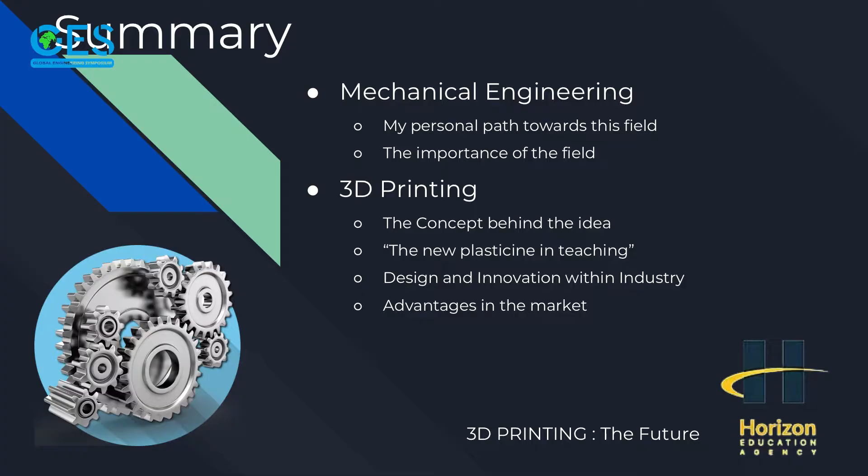So when I was young, I got some toys from my father and my mother, and I was very clumsy, so I was all the time breaking the toys. But at the same time, I wanted to fix them. I wanted to understand how they work from inside. So then I passed to the bicycles. I watched the strings, I watched the wheels, I watched all the metal that is inside.

So when I was in the 12th grade and I was trying to decide what to follow, I asked my uncle, who is an electronic engineer, and I asked my father, who is a mechanical engineer. And later I decided to go into mechanical engineering because I want to know how things work. I want to know what is behind the curtains when you see all of these objects, even the simple chair - how does the chair recline? And I went to ISEP. ISEP has a lot of programs for foreign students, so if you would like to ask me questions later about ISEP, you are most welcome to.

Nowadays in Portugal, for example, to point out the importance of mechanical engineering, all the grades to enter university are getting higher. In the past, it was medicine. Now, the best students from secondary schools are engineers. Our grades are from 0 to 20, so as close as 20, the better the grade is.

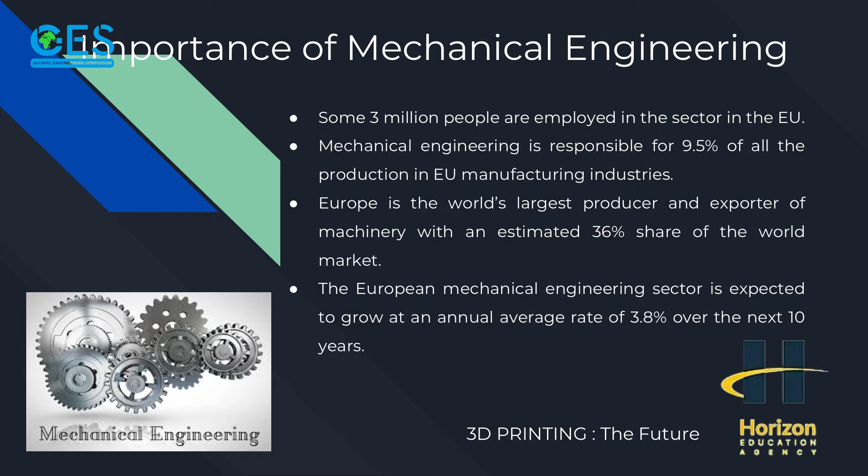Also the importance of mechanical engineers: some 3 million people are employed in the sector in the European Union. It's responsible for 9.5% of all the production of EU manufacturing industries. Europe is the world's largest producer and exporter of machinery, with an estimated 36% share of the world market.

So it's a sector that is ready to explode in the future. So we need to catch up with the train and form even more students so it can create new job opportunities, and hopefully more startups for mechanical engineers.

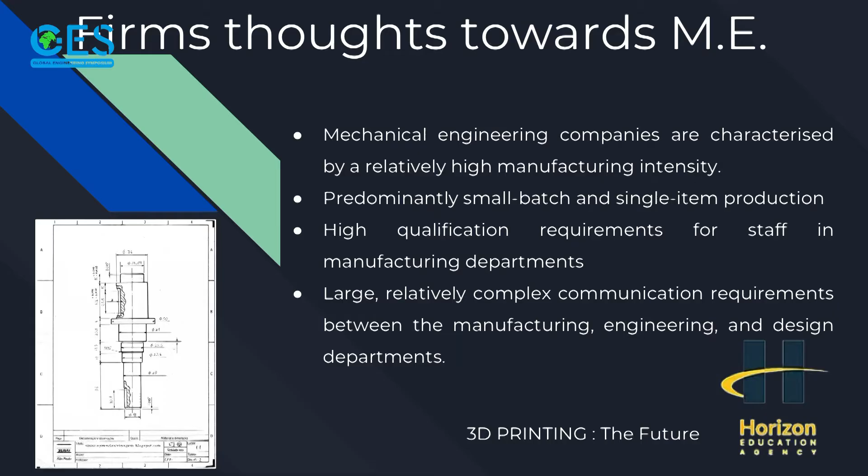And what are the thoughts about the companies that want to hire mechanical engineers? They have relatively high manufacturing intensity, so a lot of products coming from the assembly line, high qualification requirements for staff in manufacturing departments. So it's a person who has to deal with a series of staff, from the simple worker to the boss, to create a connection between all of them with the products and with the requirements and measures. So there's relatively complex communication requirements between manufacturing, engineering, and design departments. But what are the future challenges?

The research is vital to the competitiveness of the sector. So nowadays, most companies are putting very strong ideas on creating patents. Because if you create something and don't patent it, someone, for example, in China can do it for a much lesser price because of the huge market they have there of raw materials. So it's always important to protect your ideas, so you have to create patents.

And there is also a need for a stable, predictable, and coherent regulatory environment that embraces smart principles and is as straightforward as possible. It means you have to create clear and directive ideas, so the job is done by the simplest worker as fast and as simple as possible.

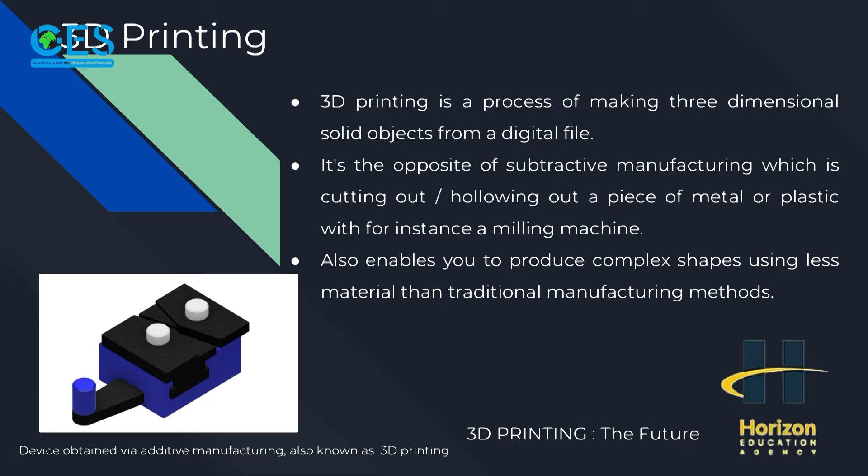So about 3D printing: it is the process of making three-dimensional solid objects from a digital file. It's the opposite of subtractive manufacturing, which is cutting out or hollowing out a piece of metal or plastic with, for instance, a milling machine. So instead of creating a steel plate, then bending it, then making drills, which is subtractive manufacturing, 3D printing is about adding material to create the shape we want. It also enables you to produce complex shapes using less material than traditional manufacturing methods.

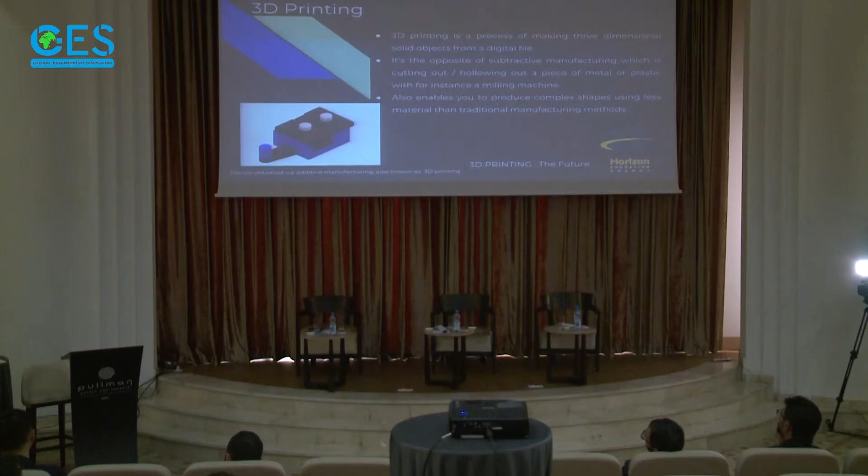So this is the basic modus operandi. It all starts with a 3D model. It can be, for example, SolidWorks or Autodesk Inventor. You can create one yourself or download one from a 3D repository. When creating it yourself, you can choose to use a 3D scanner, app, device, code, or 3D modeling software. Then comes the slicing part, dividing the 3D model into hundreds or thousands of horizontal layers using a proper program. But some of the programs in the 3D printer machines already have this tool, so you don't need to actually create the file.

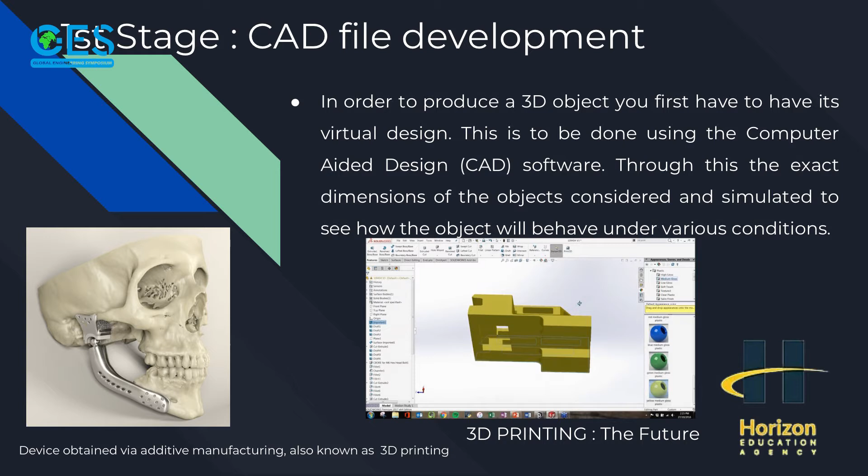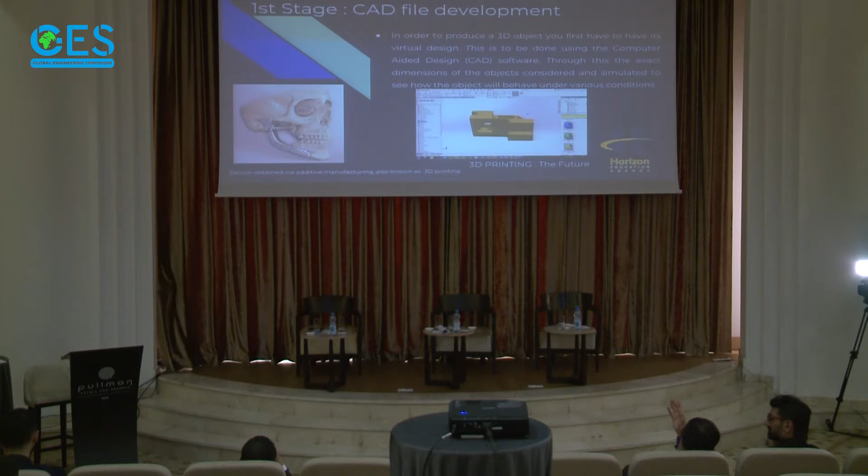Dividing it by steps, this is the CAD file development. You have to use a computer-aided design program, for example, in this picture, SolidWorks. Then you can choose the material and the colors. Then you pass that 3D file into an STL type of file. Some programs already have this option when you save the drawing.

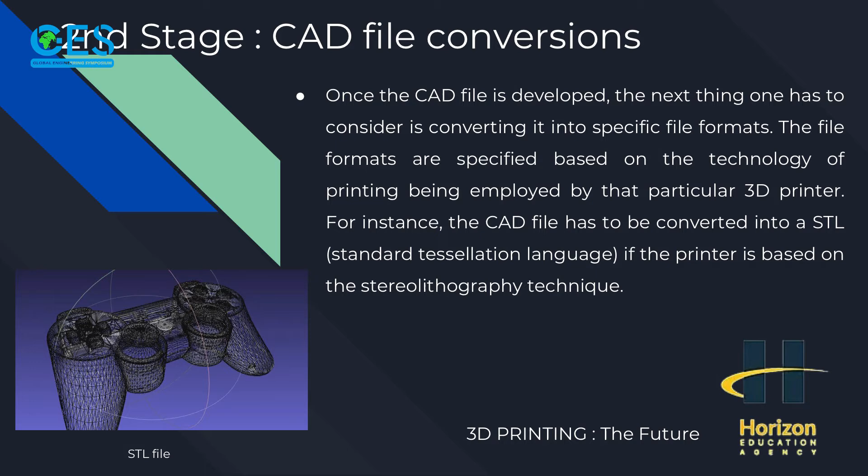What the 3D printer machines usually use is the stereolithography technique, most commonly referred to as SLA, one of the most popular and widespread techniques in the world of additive manufacturing. It works by using a high-powered laser to harden the liquid resin contained in a reservoir to create the desired 3D shape.

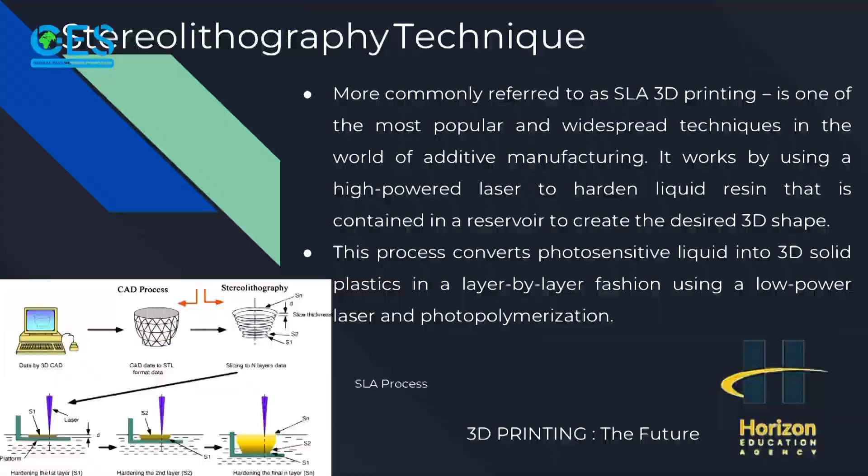So here we have the computer saving the file from CAD to STL. Then there are the layers, here's the laser slicing in the resin, and then it creates this shape. Of course, there are other types of techniques.

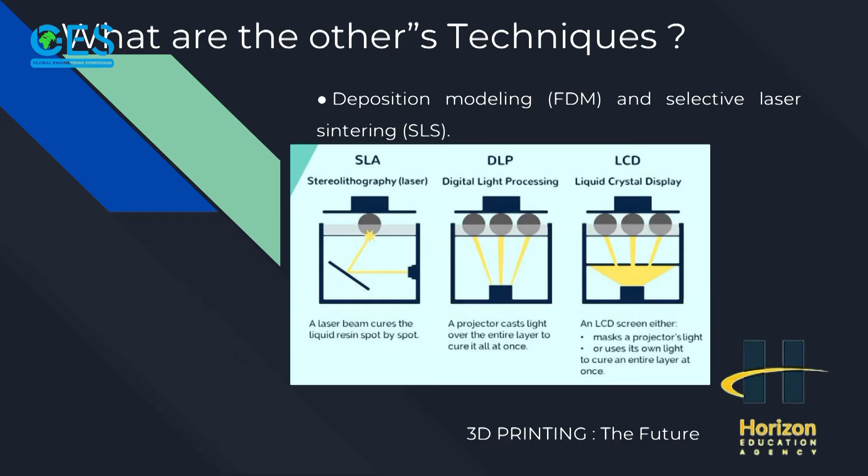For example, we have fused deposition modeling, FDM, and selective laser sintering. We can also divide SLA into DLP, digital light processing, and LCD, liquid crystal display. In the case of DLP, a projector casts light over the entire layer to cure it all at once. For LCD, the screen either masks a projector's light or uses its own light to cure the entire layer at once.

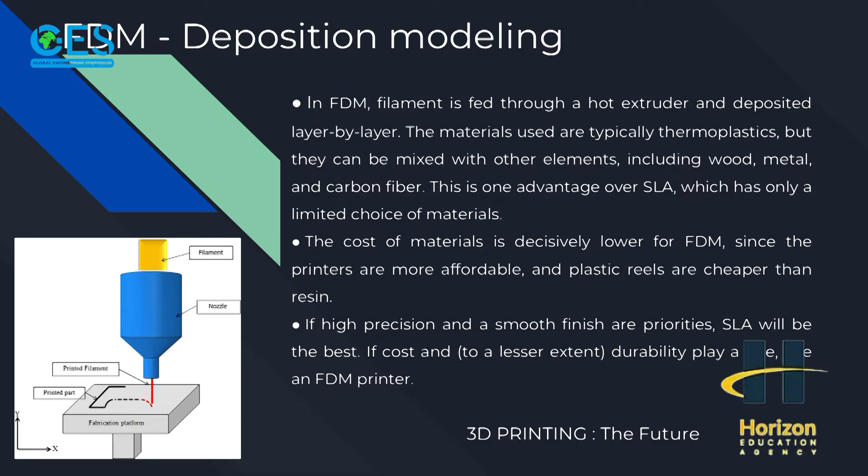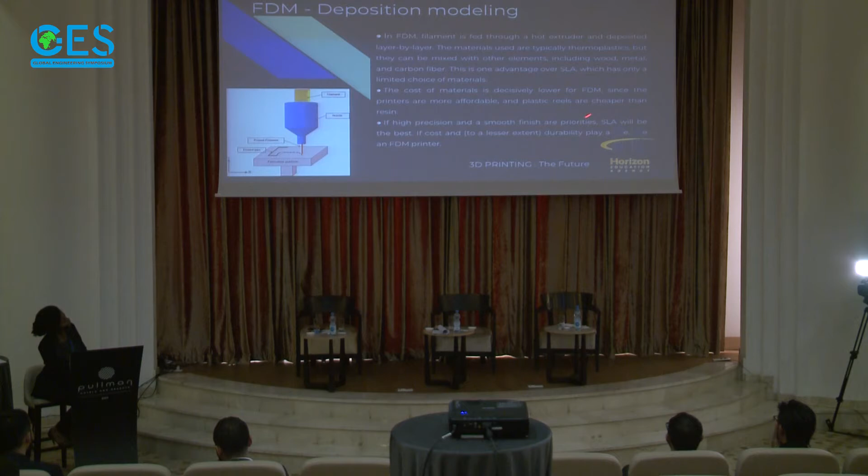In the case of FDM, a filament is fed through a hot extruder and deposited layer by layer. These materials are typically thermoplastics, but can also be mixed with other elements, including wood, metal, and carbon fiber. This is one of the major advantages over SLA, which has a limited choice of materials, for example ceramics, mostly resins. The cost of materials is decisively lower for FDM, since the printers are more affordable and plastic reels are cheaper than resin. If high precision and a smooth finish are priorities, SLA is the best choice. If cost, and to a lesser extent durability, plays a role, an FDM printer is the best.

In case of SLS, selective laser sintering, this is a nylon powder, and the laser will use this powder and sinter it. It's more powerful because instead of curing a substance, the beam hits a powder to the point of fusing particles together. Prints are especially strong and durable, also because supports aren't necessary, and prints can be of complex geometries. So if high mechanical strength and complex shapes are your priority, and cost is of minor importance, use SLS. Otherwise, SLA is still the best choice for you.

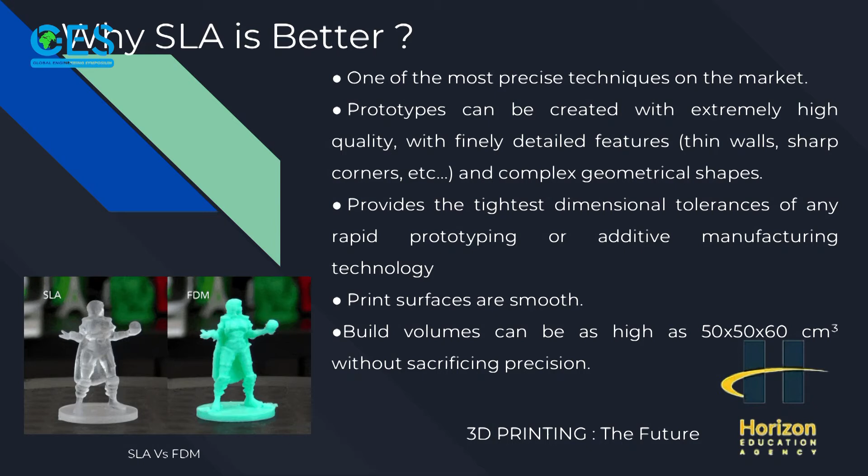But I was talking about so many of these, and my focus should be SLA. Why is SLA better? It's one of the most precise techniques on the market. The print surfaces are smooth. Compare this picture with this one, see the endings.

And of course, the sizes are not the greatest. We're talking about 50 by 50 by 60 cubic centimeters without sacrificing precision. So it's rather small objects.

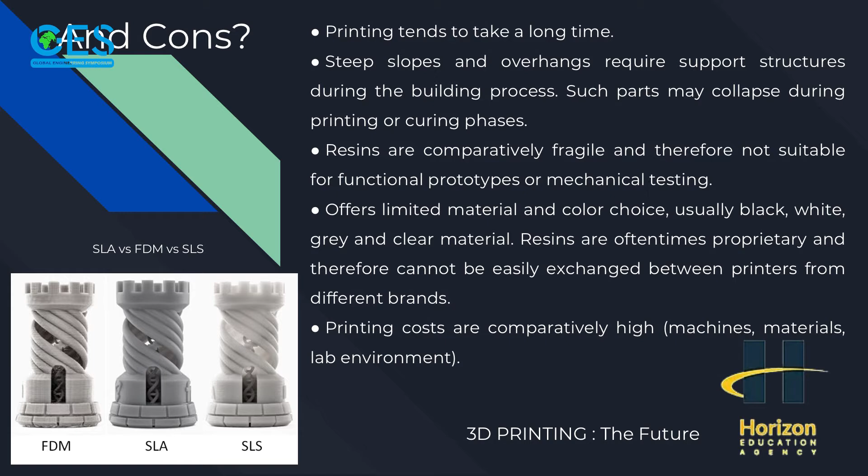But of course, there is also something against SLA. Prints tend to take a long time. For example, for a 3D printer machine, the fastest you can get is around 10 minutes, but for big objects with complex shapes, it can take several days. So it's all about the waiting there.

Steep slopes and overhangs require support structures during the building process. Also, you need a good technician to operate this 3D machine. We're also talking about that.

Resins are comparatively fragile and therefore not suitable for functional prototypes or mechanical testing. It offers limited materials and color choices, mostly ceramics and resins, usually black, white, gray, and clear material. So the choice of color that the printer produces with SLA is not very great.

Those resins are oftentimes proprietary and therefore cannot be easily exchanged between printers from different brands. So the resin from printer X and the resin from printer Y are very different, you cannot swap between them. So there's only a small choice in the market.

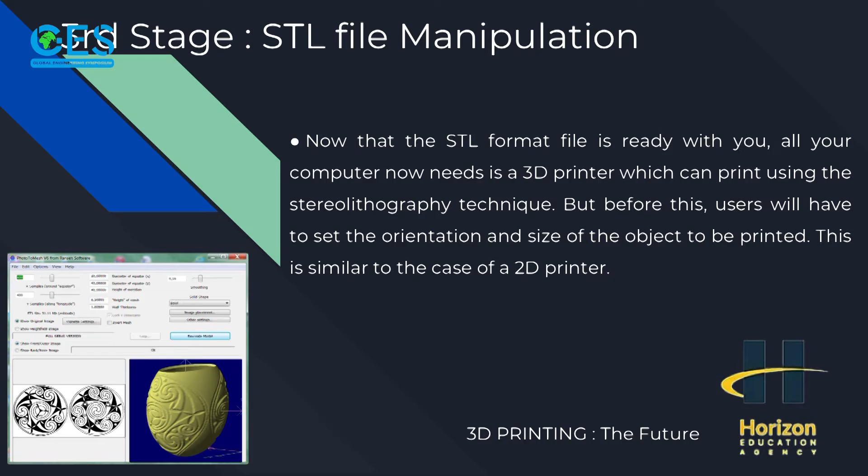Passing now to the third stage, there is the STL file manipulation. After you create the STL file, you need to choose categories like height, velocity of the machine, and materials. Once the file is ready, all the computer needs is a 3D printer which can print using the stereolithography technique, SLA.

But before this, users will have to set the orientation and size of the object to be printed. This is similar to a 2D printer, where we also choose how the text will appear on the paper, whether it's horizontal, vertical, and so on.

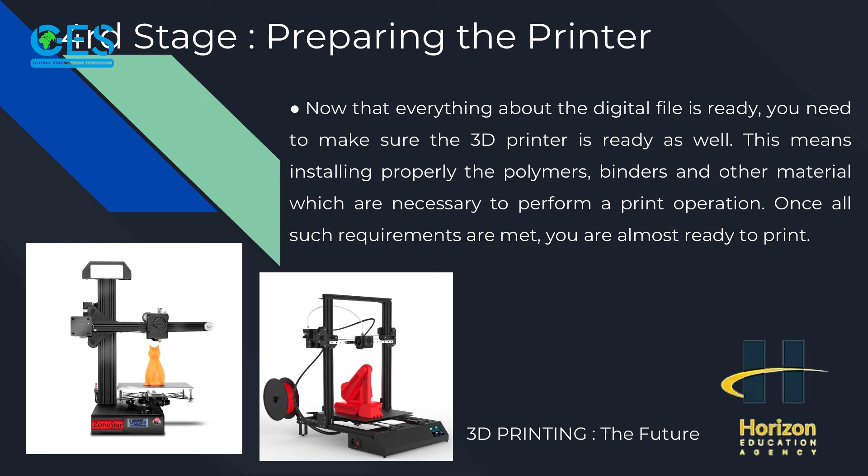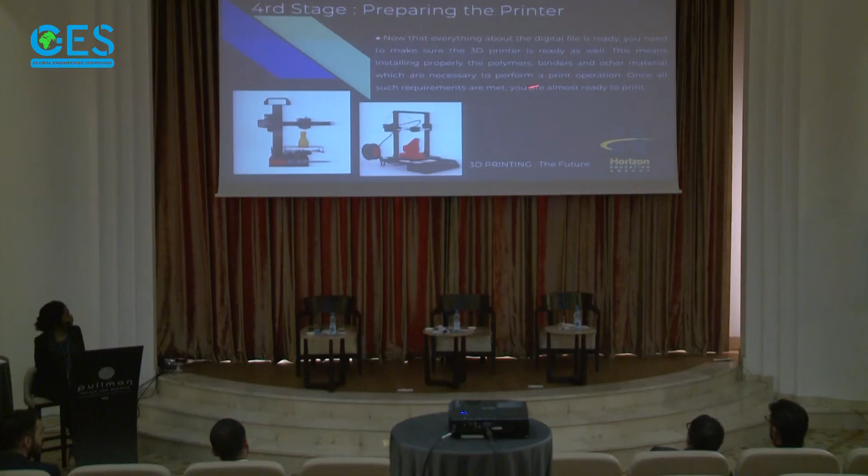Then the fourth stage, you need to prepare the printer. Of course, it needs to be connected to energy, but we also need to make sure we install the polymers, the materials that we need, which is necessary to perform the print operation. Once such requirements are met, you're almost ready to print.

Then there is the building up. Now this part is all about waiting. As I said before, it can take from 10 minutes to several days, depending on the size and complexity of the material.

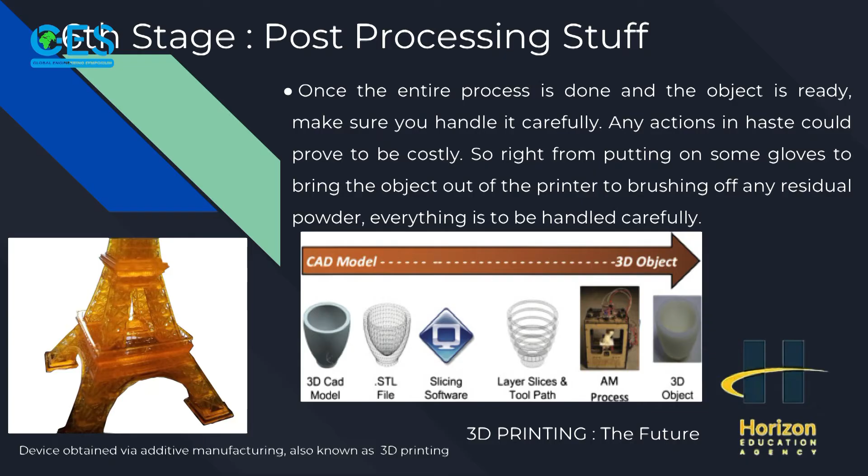Then there's the post-processing stage. You cannot just take the piece and try to push it hard with your hand. You need to be careful the first time you use the material.

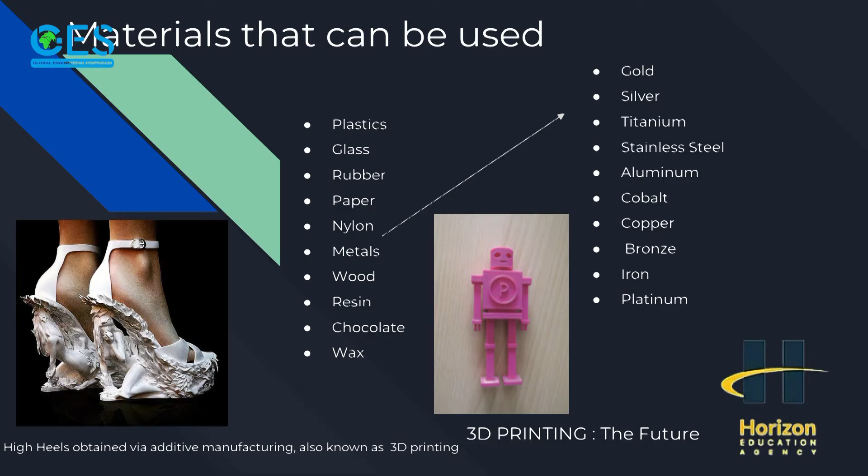Talking about the materials that can be used, there's a whole variety of choices, even chocolate can be used in the 3D printer machine. There are also all these metals: gold, silver, titanium, stainless steel, aluminum, cobalt, copper, bronze, iron, platinum.

Reconstructing bones and body parts in forensic pathology, and reconstructing heavily damaged evidence retrieved from a crime scene. So it can also be used by the police.

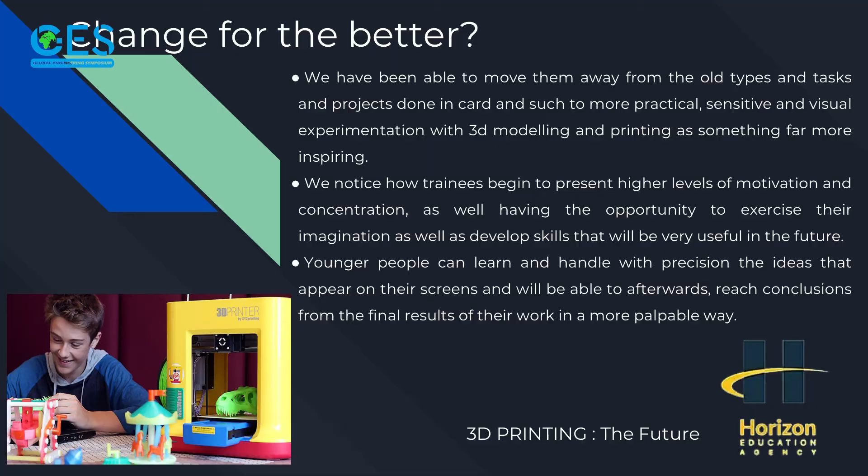But is it changed for better? We notice how trainees begin to present high levels of motivation and concentration. There are already studies that prove that using these 3D printer machines, children get more motivated and more concentrated, and they have the opportunity to show their teachers and colleagues their imagination on a whole new level.

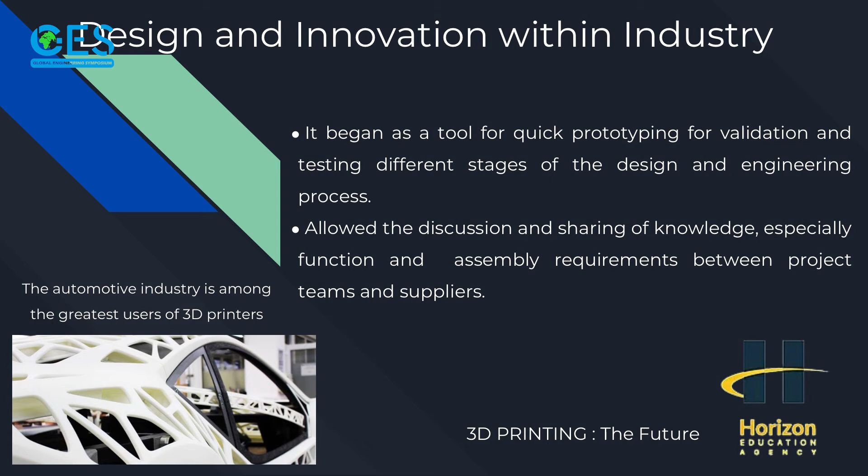Within the industry, it began as a tool for quick prototyping and validation testing at different stages of the design and engineering process, allowing the discussion and sharing of knowledge, especially function and assembly requirements between project teams and suppliers.

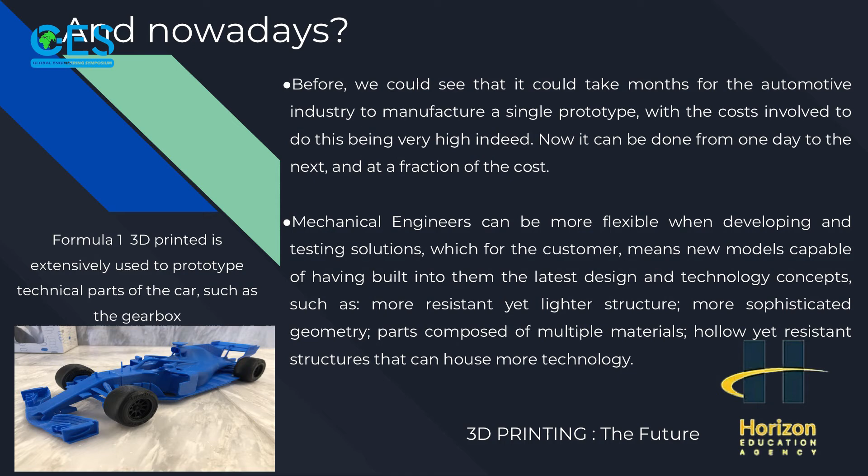For example, nowadays Formula One extensively uses gearboxes made by a 3D printer. Mechanical engineers can be more flexible when developing and testing solutions, with more freedom to test ideas without needing the whole team to make a prototype that can take months to build, and then needs changes again.

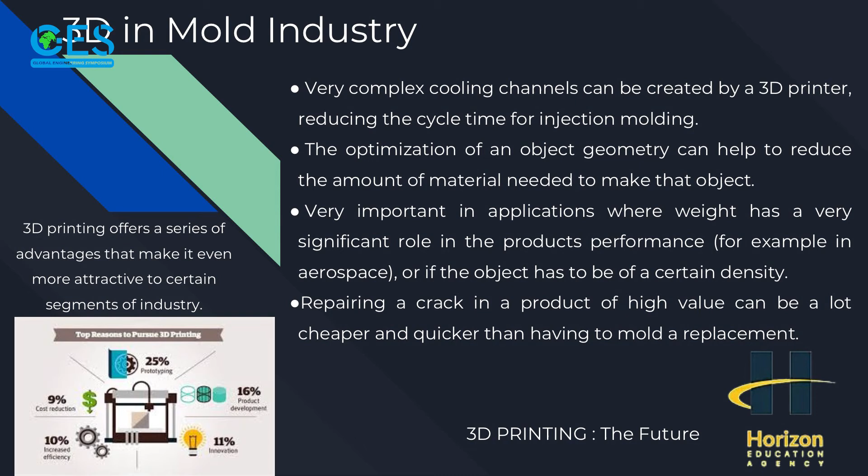So we are talking about a process of months, but with a 3D printer they can reduce that process to a couple of days. Also, speaking about the mold industry, very complex cooling channels can be created by a 3D printer, reducing the cycle time of injection molding.

Repairing a crack in a high-value product can be a lot cheaper and quicker than molding a replacement. That's why it applies to artifacts too — if the idea is to rebuild an artifact to its original shape, you can use a 3D printer, because replacement of a nation's artifact is otherwise impossible to get.

But of course, there are also challenges in the industry. You can't just put a 3D printer machine in the middle of the factory and expect it to magically work. You need to hire technicians, and you need to give them hours and hours of training.

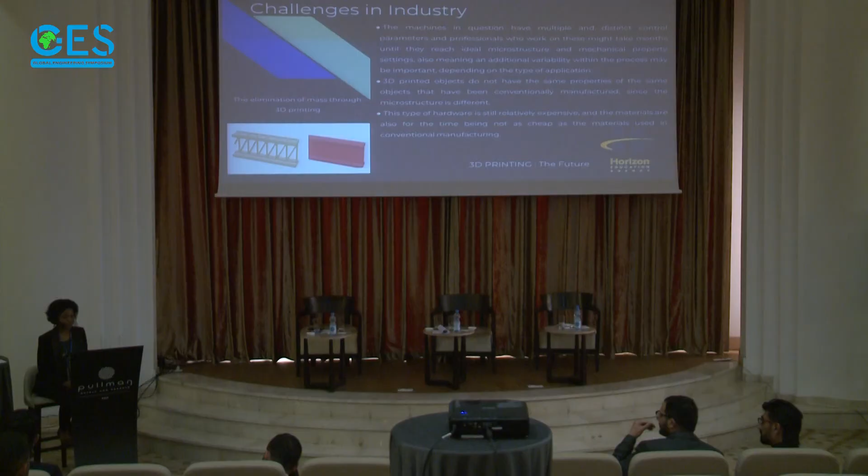So there's a lot to work with, and you need to decide which type of material you are going to use. They don't have the same properties as objects that have been conventionally manufactured, since the microstructure is different.

But in the future, as 3D printing becomes more homogeneous, costs are expected to fall, especially the cost of materials. So in the future, it will be easier to recruit more talented youngsters. 3D printing provides additional technology that they can exercise their creativity to an advantage.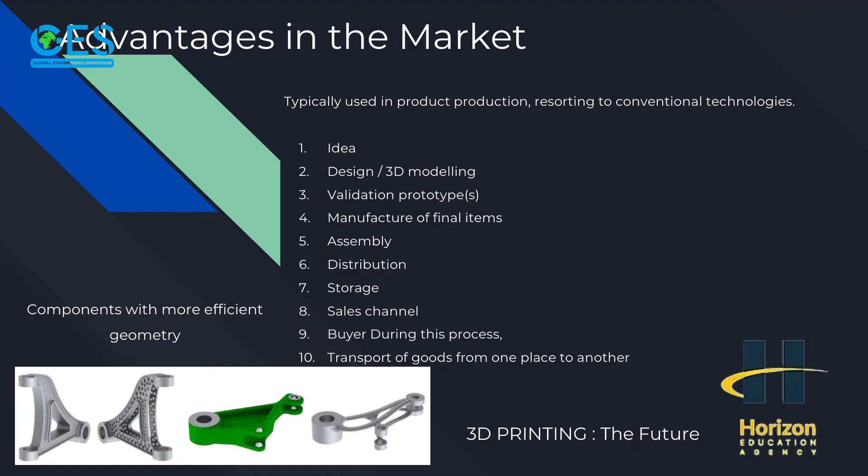Now I'm going to show you more or less the advantages in the market. This is the typical process from the company: there is an idea, there is 3D modeling, for example in SolidWorks, there is a validation prototype, there is manufacture of final items, assembly, distribution, storage, sales channel, buyer during the process, and transport of goods from one place to another. So it's a huge quagmire.

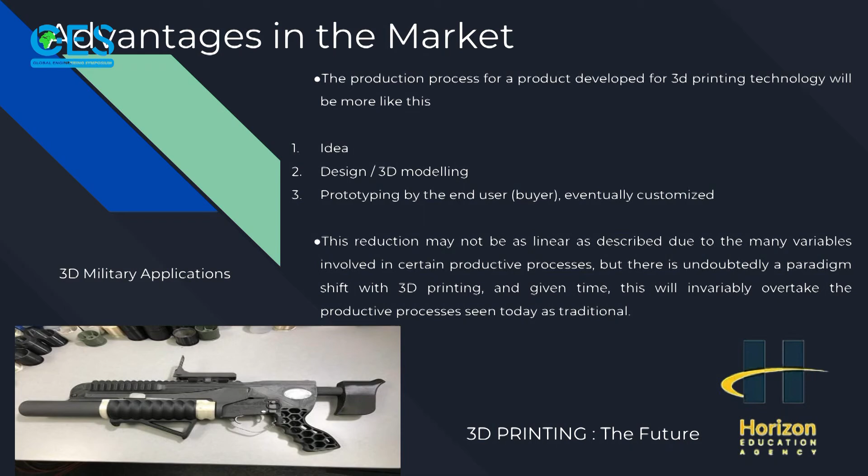But with 3D printing, this is a very simple way of saying it, it's not correct in all cases, but the main idea is to have just the idea of the client, the design in 3D modeling, and the prototyping by the end user, the buyer. So you guys come to me with an idea, I do it in my home in my SolidWorks program, I send you the idea, you have a 3D printer machine in your company, you just have to print it, and that's done.

Over here in this picture, there's also military applications. There was a case a couple of years ago in the United States where someone created a gun in SolidWorks, and that gun made by a 3D printer machine can be deadly. So the American government tried to erase all of these gun designs, so people just cannot make guns at home when they want.

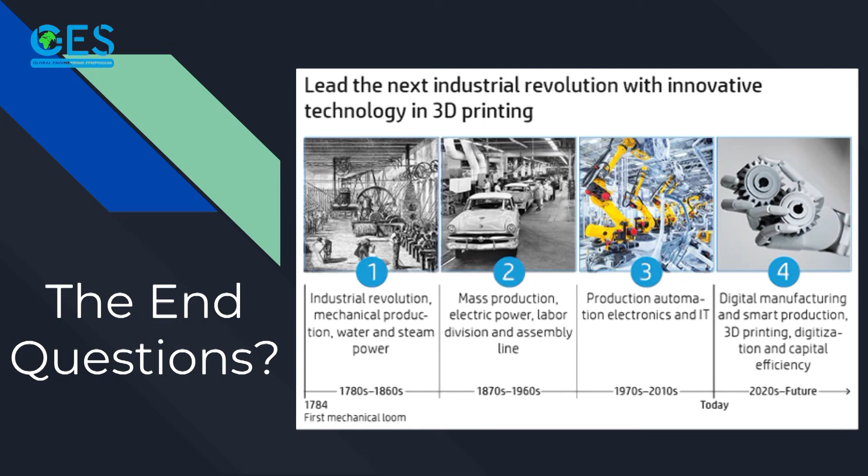So thank you all for your attention, and thank you very much.

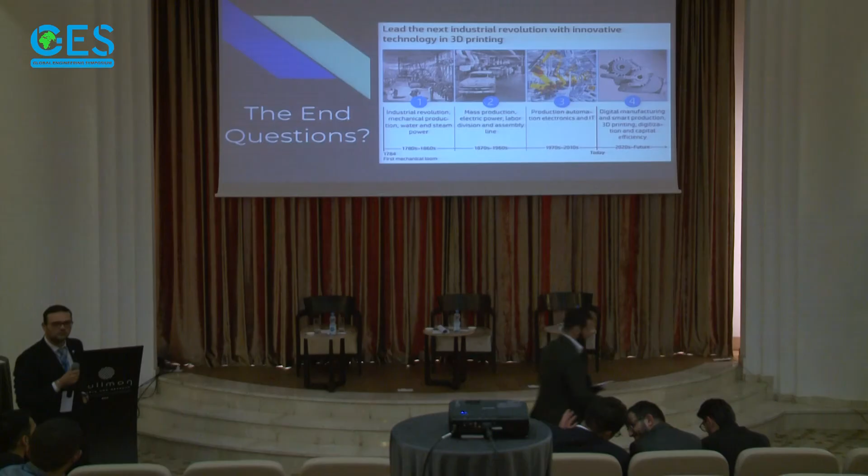Another question is about 3D printing, you say that this obviously uses electricity. If the electricity shuts down, what will happen? Will it start where it stopped or not? And another question, you said that we can create our homes with 3D modeling. I think there are two types of houses, one from stone or wood, and another one created with 3D modeling. What's the comparison in strength, whether windy or rainy, between these two objects?

Regarding the question of the program, I think SolidWorks is much more useful when you're dealing with 3D designs. AutoCAD, for me, is more useful for 2D designs. About the electricity in the printers, some of them already have small batteries inside which can store up energy, so when the power goes down, this storage battery can have a durability of hours. It's like our solar panels at home, if you have a solar panel it's impossible to have sun 365 days a year, there will be cloudy days, so there are ways to store energy.